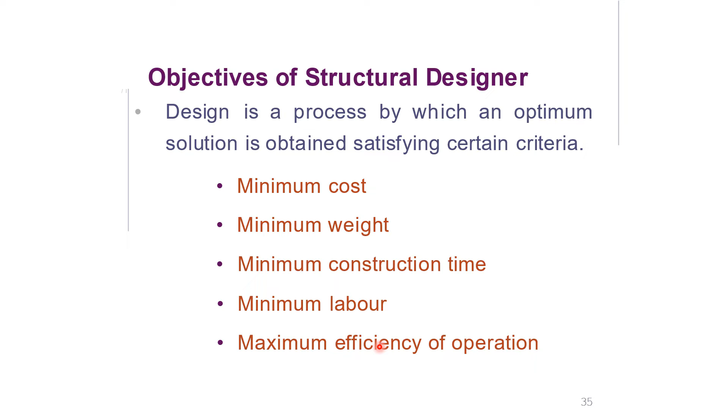While keeping these points, you can see your client's requirements, like you are going to design some member with minimum cost, minimum weight, lightweight, minimum construction time, minimum labor, and maximum efficiency of operation, meaning for the good intended life of that structure. That is the objectives of the structural designer.

Objectives of structural designer: they must learn to arrange and proportion the parts of structure so that they can be practically erected and will have sufficient strength and reasonable economy. For example, the structural designer designs the member, but that steel section is not available in the market. So there will be a lot of difficulty in arranging the members. So it is the structural designer's responsibility.

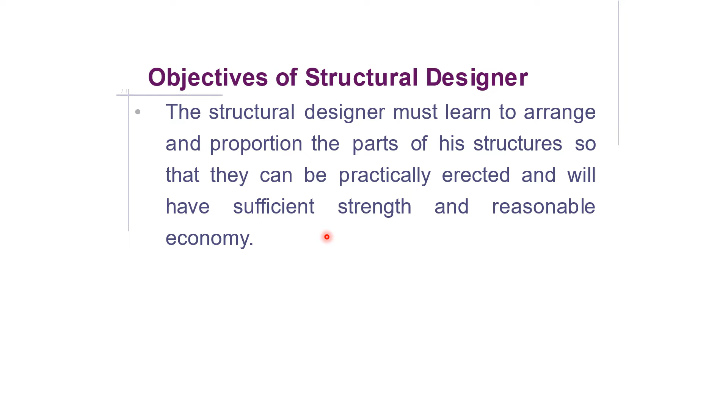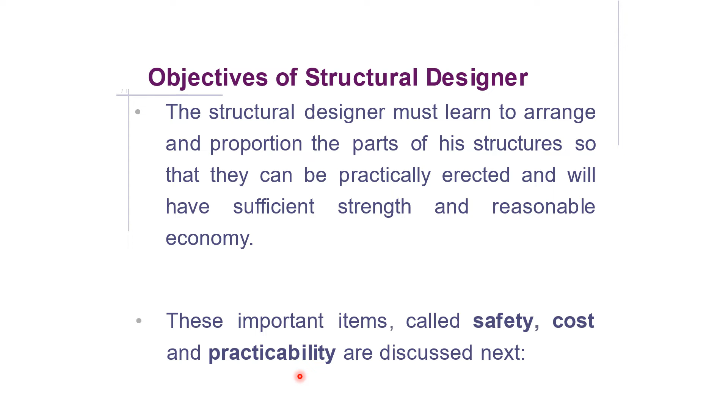He should have a market survey, so that the members should be connected well, and the member can give sufficient strength and reasonable economy. These important items called safety, cost, and practicability are discussed next. So practicality is very important. That comes with experience.

Objectives of designer. The structure must safely support the loads to which it is subjected. So whatever member you design, it can bear the loads safely. So that is the first objective. The deflections and vibrations should not be so excessive as to frighten the occupants.

For example, you have designed the steel member, it has sufficient strength, but it is so ductile that it gives large deformation. The occupants or the residents in the building may think that the members are going to collapse, but it has sufficient strength. So that is not a good thing. So the deflection and the vibration should be within the limits, or you can say the serviceability limit criteria.

The designer must keep the construction, operation, and maintenance cost at the lowest levels without sacrificing the strength. So whatsoever material, for example, if you are going for design of steel structure, you must recommend the protection criteria, so that on future maintenance cost and all these types of expenses, the client may save the cost.

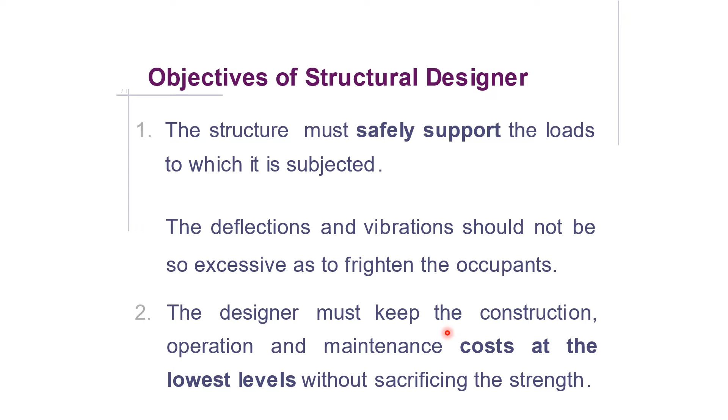Designers need to understand the fabrication methods and should try to fit their work to the available fabrication facilities, available materials, and the general construction practices. For example, the steel structures are connected by different methods, like they can be riveted, bolted, and welded.

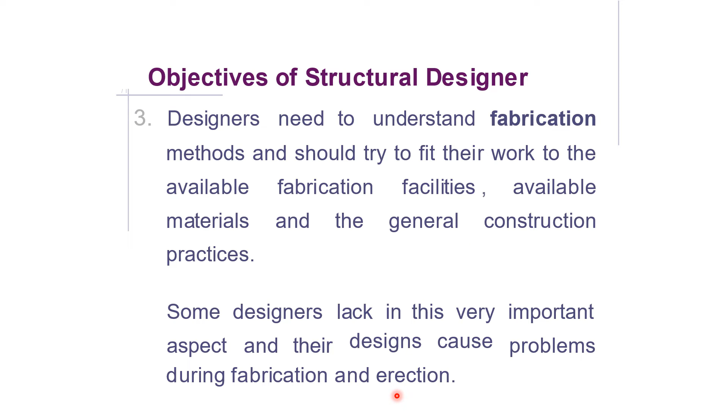If one person never saw what is riveted, how can the designer understand and design the structure in the fabrication? So the structural designer must have the knowledge of the fabrication methods, how the members will be joined with rivets, welds, and bolts in steel structures. Some designers lack in this very important aspect, and their designs cause problems during fabrication and erection due to the lack of fabrication knowledge.

Designers should learn everything possible about the detailing. For example, after the design of steel structure, you have to sketch that member on the drawings. So the designer must have a good understanding of the detailing, the fabrication and the field erection of steel, besides the loads, mechanics, and the expected material strengths. So the knowledge of all these things should be with the structural designer.

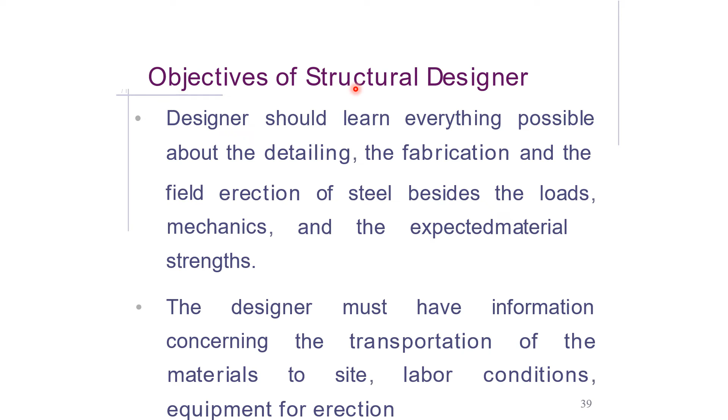The designer must have information concerning the transportation of the material to the site, labor conditions, and equipment for erection. The structural designer should have knowledge of all these things. Problems at site, field tolerance, and required clearances at the site. For example, there is no hindrance, the field is okay; what problems can come at site, the structural designer should also have knowledge of these things.

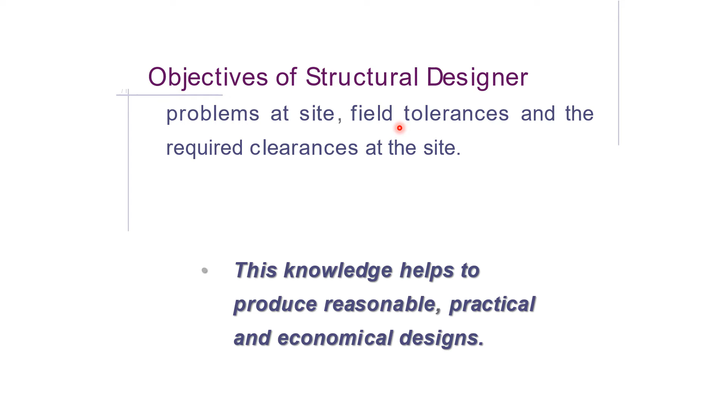This knowledge helps to produce reasonable, practical, and economical design. This is, you can say, the theme of these objectives of a structural designer. All this knowledge will help to produce reasonable, practical, and economical designs.

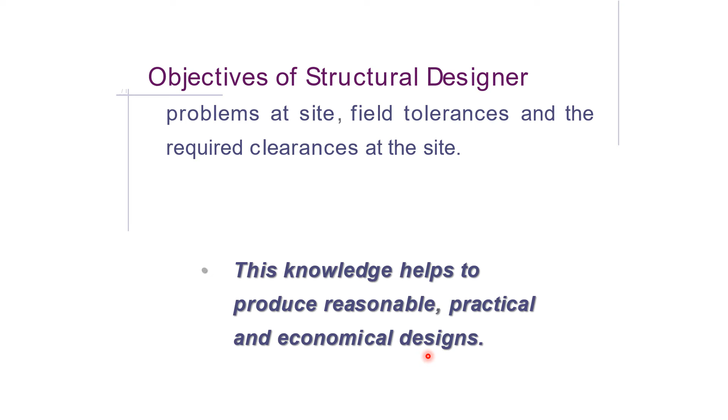Structural design procedure. These are the basic steps for the structural design procedure. First of all, we collect and list all the known data, like what is the span of the beam, what is the loading, dead load, live load. We collect all the data, and then we will select a trial section. First of all, we make a trial, like this much cross section will be okay for this.

If the member goes for failure, then we revise the section with higher dimensions and higher strength of the material. We repeat this process. After satisfying these checks on the trial section, we apply the stability check, and then we will perform the strength checks. What are the stability checks? In the steel section, the most common phenomenon of failure is buckling. Their flange and their web can locally buckle. So we also have to perform the stability checks.

Then we perform strength checks, that is, material strength, meaning the applied loading should be less than the material strength. Then we perform serviceability checks, meaning deflection should be controlled within the limits. Accept the section if all these checks are okay. For the trial section, we perform these checks, as I have just explained in the theory. So here are the checks one by one. If all checks are passed, we will accept that section.

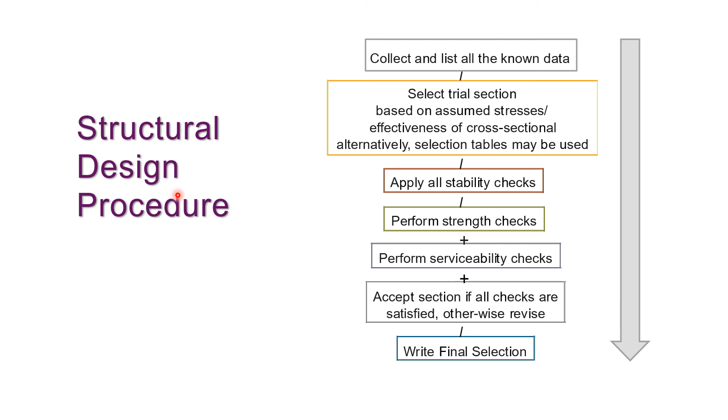Limit state. I have already explained it, but I will explain it here also. Limit state is defined as the stage in the loading after which the structure cannot fulfill its intended function due to strength and serviceability considerations. The limit state is the strength criteria and the deflection or serviceability criteria. If anything goes beyond the strength criteria or the serviceability criteria, the member will go for failure.

The term limit state is preferred compared with failure, because in most cases of limit state, the actual failure or collapse does not occur. What it means is, we design our member within the elastic range, and when the member reaches its yield strength, we say that the member has gone for failure. But it does not mean the member actually fails. The member has a reserve strength. That is why limit state is preferred compared with failure. We say when the member reaches yield strength, the member is going to fail, but it still has strength, or you can say reserve strength.

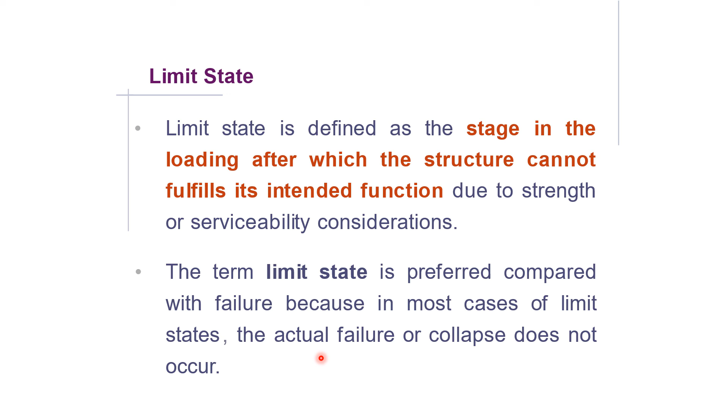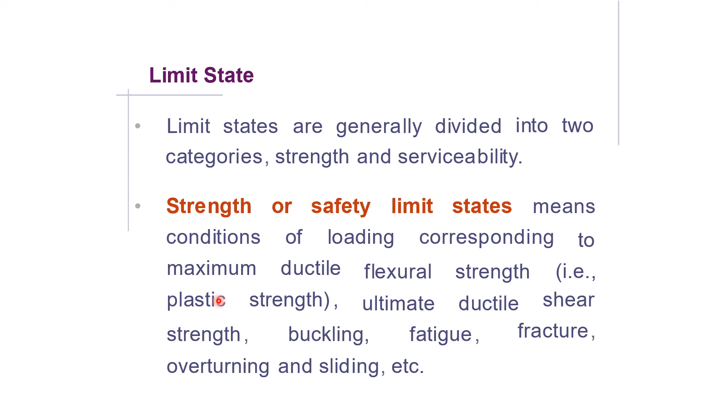Limit states are generally divided into two categories, that is, strength and serviceability. The strength or safety limit state means the condition of loading corresponding to a maximum ductile flexural strength, for example plastic strength, ultimate ductile shear strength, buckling, fatigue, fracture, overturning and sliding. All the forces which can fail the member in strength criteria, that is the strength limit state.

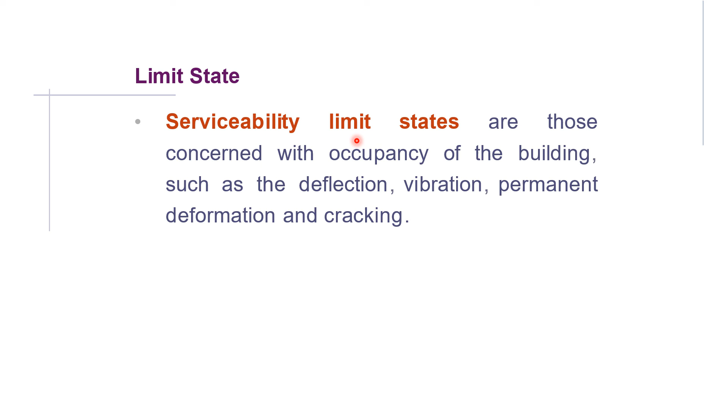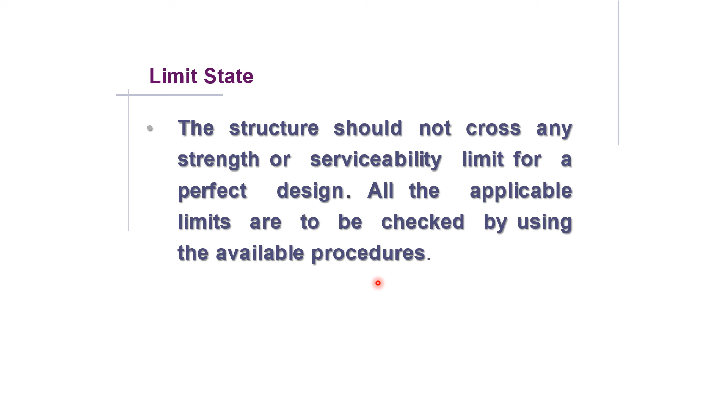And serviceability limit states are those concerned with the occupancy of the building, such as deflection, vibration, permanent deformation or cracking. All those related to deformations are serviceability limit states. For a perfect design, the structure should not cross any strength or serviceability limit. All the applicable limits are to be checked by using the available procedures given in the codes, and we will also perform them during the design.